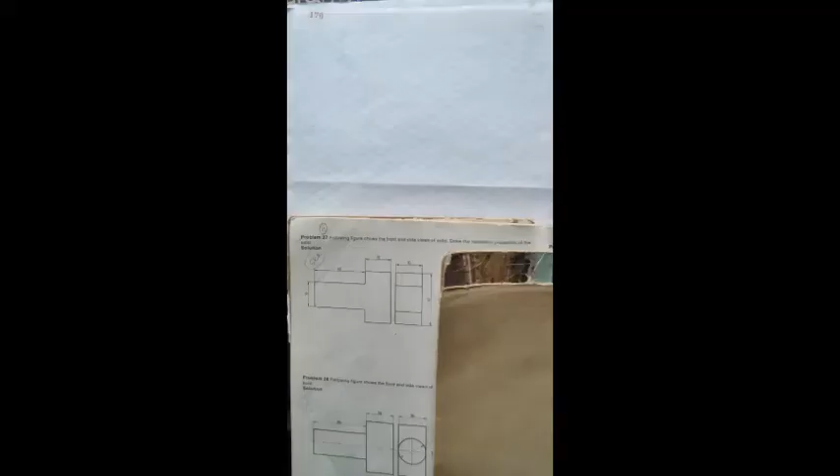Hello students, so here we go with problem number 27 from isometric projection.

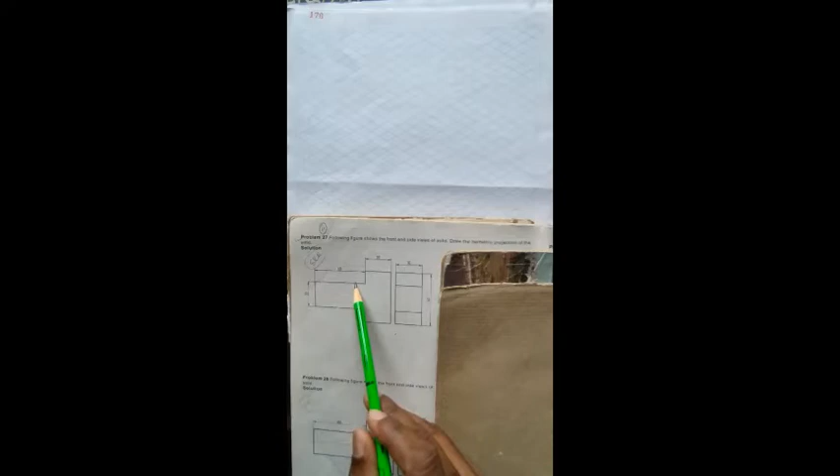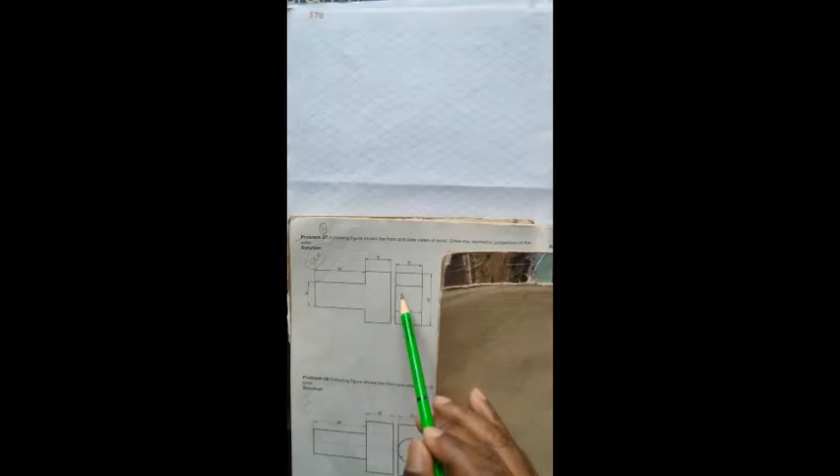Okay, so here they have given a sketch like this. We need to refer to the dimensions. For example, this is 30 mm, the length of this one is 60 mm, and the top face is 30 mm again. In the side view it is 30 mm, so this is a square, and the height of this one is 60 mm. So we have a square part here, and this is also 30 in the front and 30 in the side, so again this will be a square.

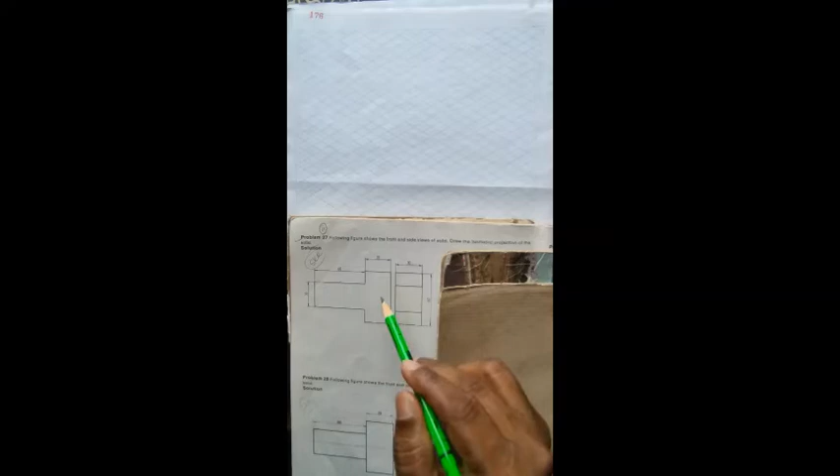So you can imagine a T joint with a square prism of 30 mm side and 60 mm length. What we can imagine here is this part coming at the front, and this going back. So to start with the problem, we'll draw one thin line.

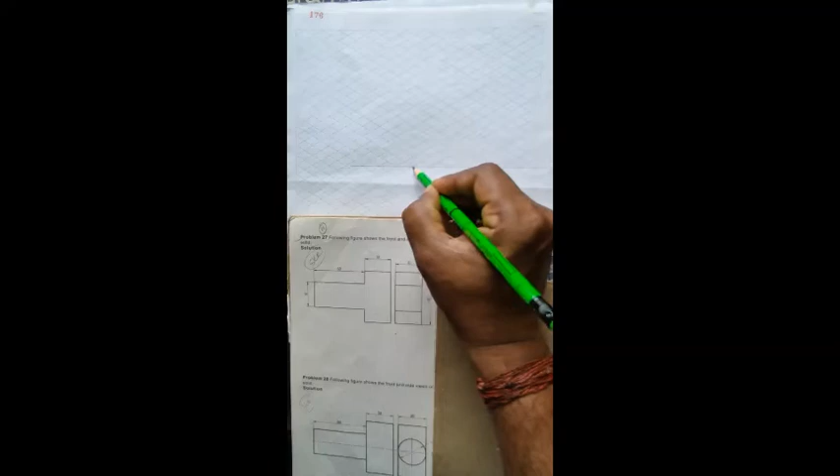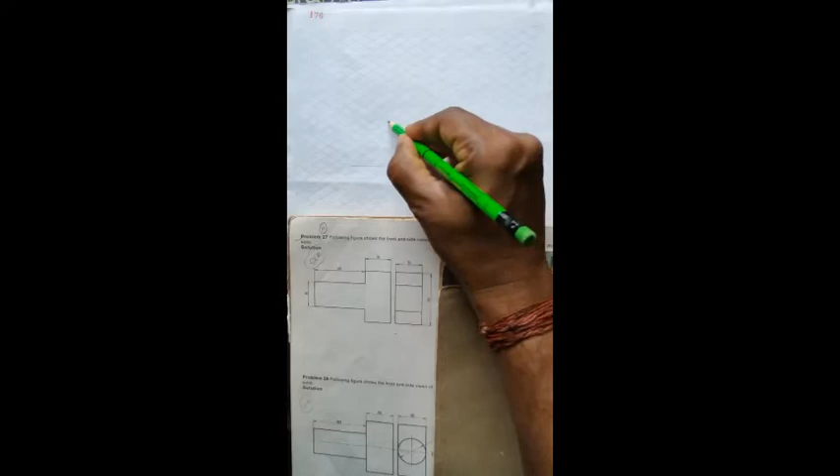If you take any one point somewhere here, the first thing is to have a 30 mm, that is the height of this one. 1 2 3, and a side again 1 2 3, again coming down 1 2 3 and again 1 2 3, so you will get a square face.

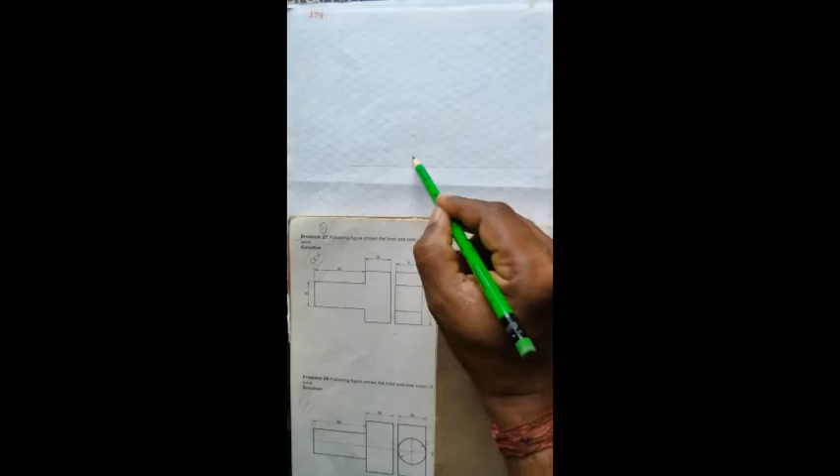This is the first face. Height 1 2 3, 1 2 3, 1 2 3, and then again 1 2 3, and the length of this one is 60 mm.

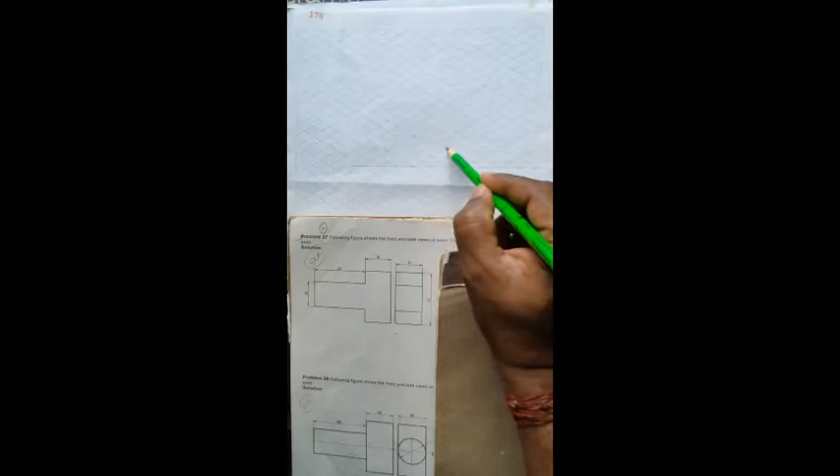So we'll take 1 2 3 4 5 6, 1 2 3 4 5 6, 1 2 3 4 5 6, again 1 2 3 4 5 6. Now again 1 2 3, 1 2 3, 1 2 3, again 1 2 3.

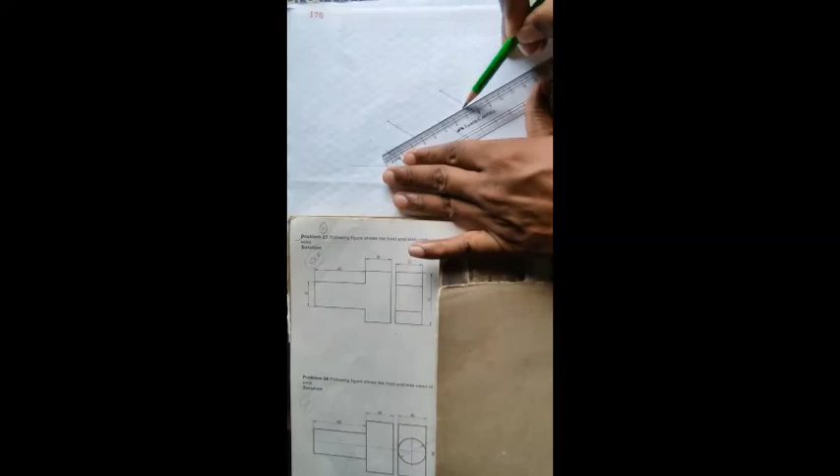So we will get two square faces which are at a distance of 60 millimeters. So what you can do here is, if you connect these, you will get... and then joining with the height, so easily you can finish your point.

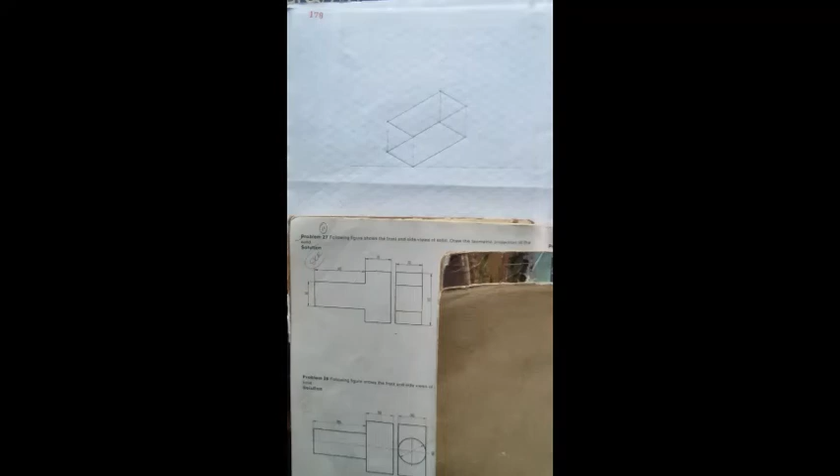So now this part is complete till here. Now we need to look into this one.

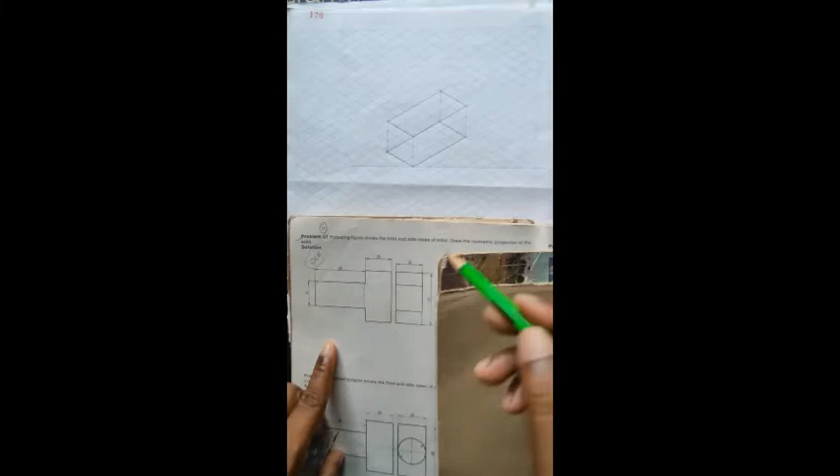Now you can see whatever the part is at exactly mid of this one. The height of this one is 60, so we need to take from the center 30 up and 30 down. So locate the midpoint here, 1 2 3, then from here 1 2 3. Then again from here, midpoint, so 1 2 3, again from here 1 2 3.

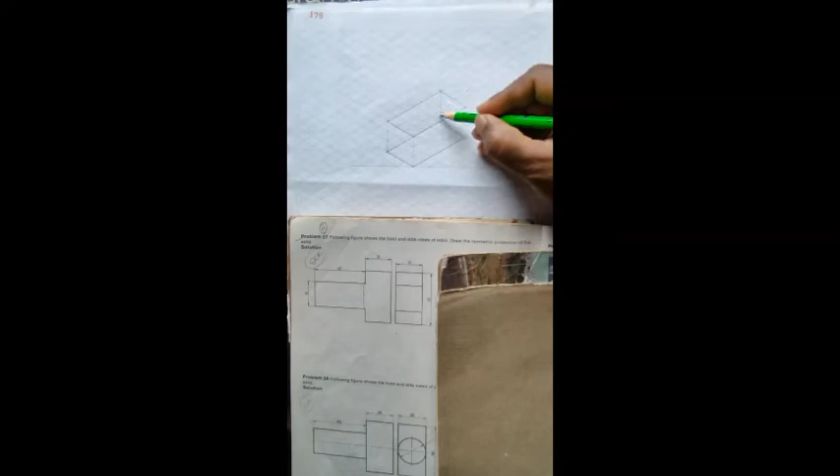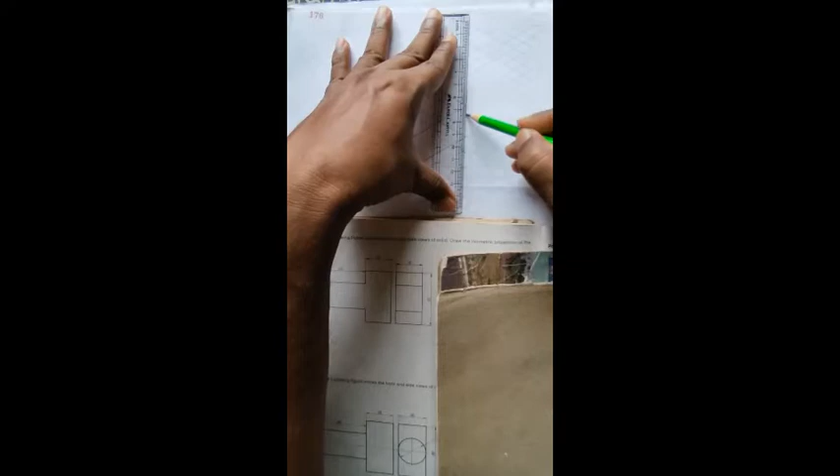Now if you see here, if you join these things, so now you can see. The length of this one will be 1 2 3, 1 2 3, 1 2 3. Now if you join here these things, you will get a square face very easily.

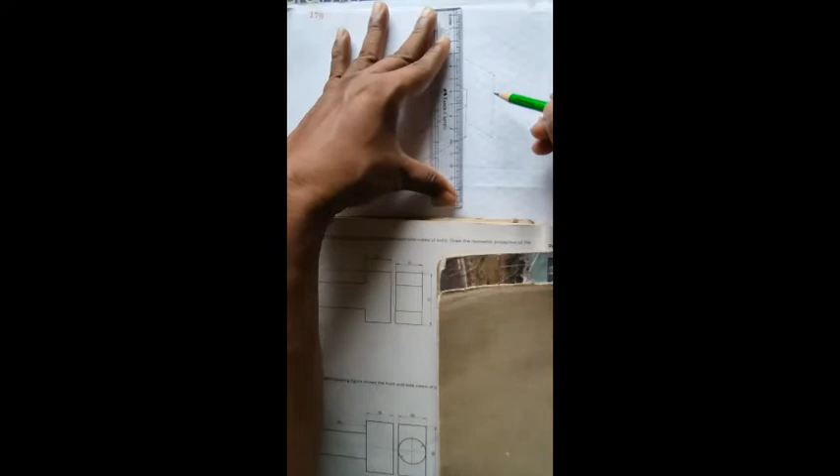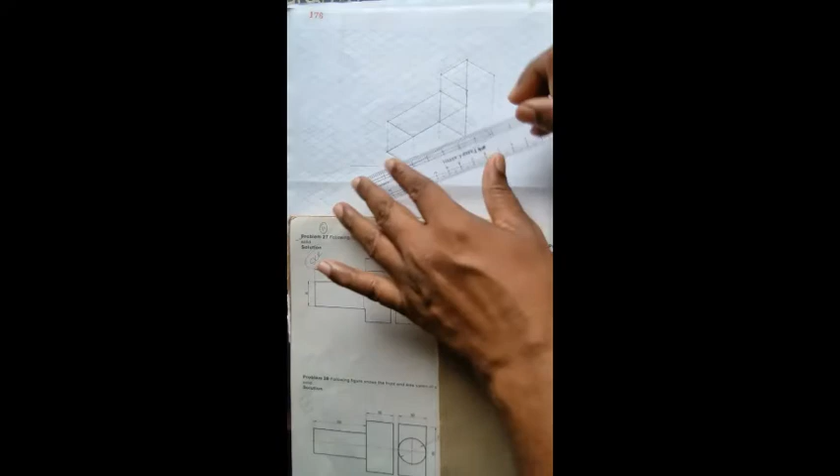So now what are the things which are visible now? This square face will be visible, and these lines will be visible, that is the top face, and these lines.

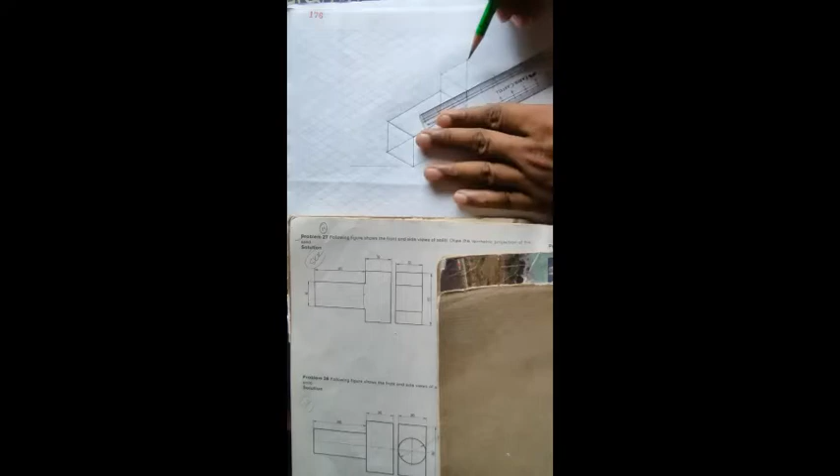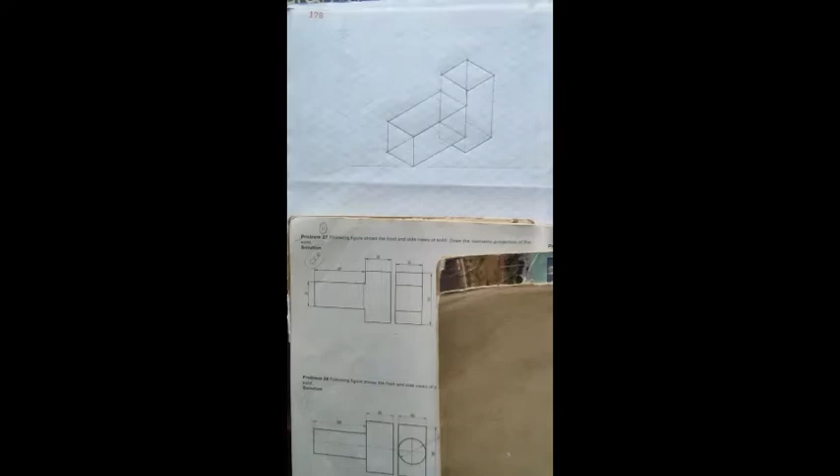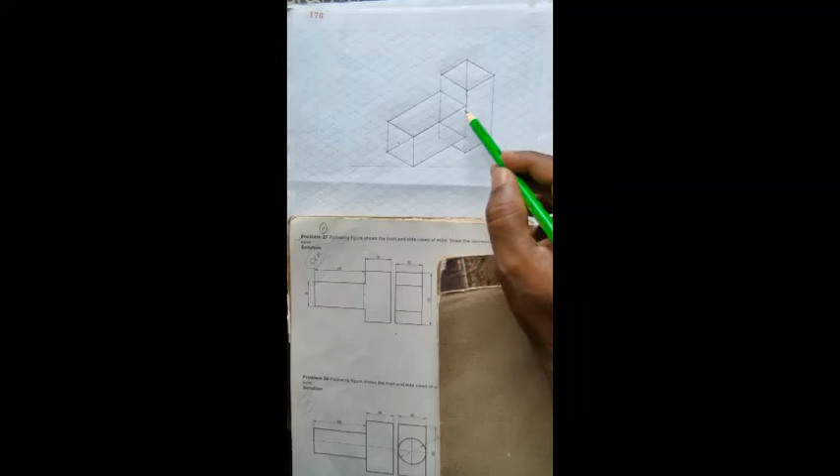Okay, this part will be visible and this line will be visible. Now the important thing is there is no connecting point here, so the line from here to here should be thin. Just erase a little bit, so this part will not be visible to us. So face 1, 2, 3, then this whole line from here to here, then this whole face, and we're left with this part. This part will be visible to us. Okay, so that's number 27.

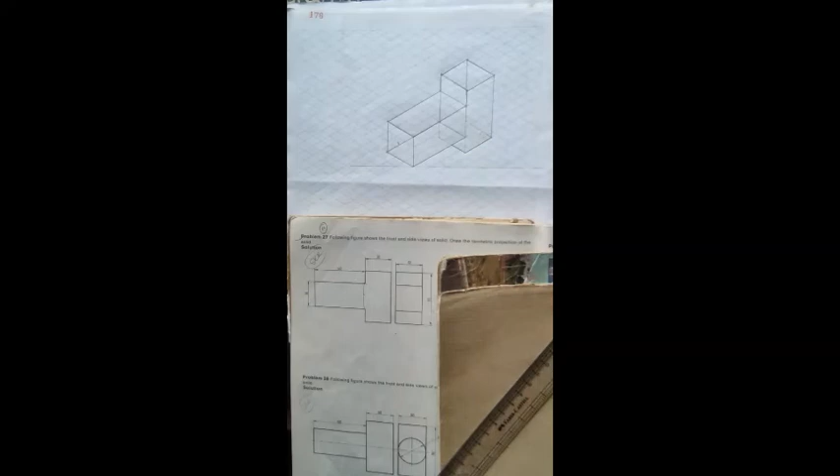So where it says, we have a square, a T joint, square prism like a T joint, which will run 90 degrees to each other. And continuing it, similarly the same.

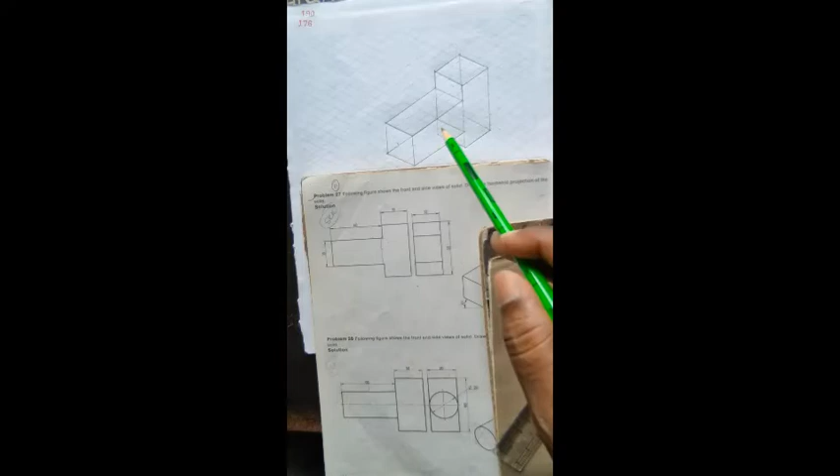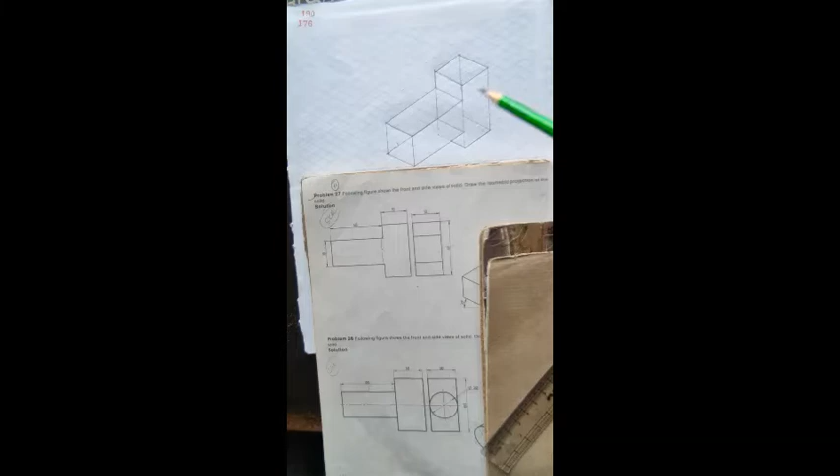If you look into problem number 28, everything will remain the same. So 60, 30, 30, 60, and the diameter is also 30. In problem 27 we constructed a square one, here we are going to have a cylinder. It is something like a base with a cylinder of 30, height 60, which is connected to a square base. You can see there is a square base. The only thing is we need to have a cylinder, that is a circular way in these things. So let's see how to go with that.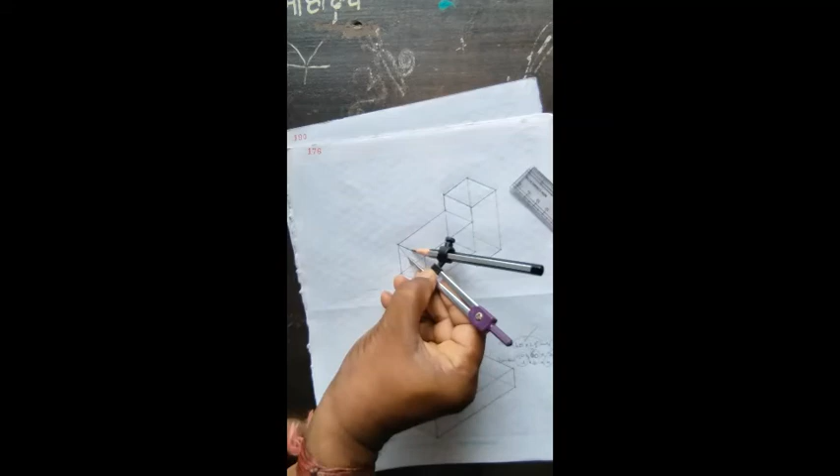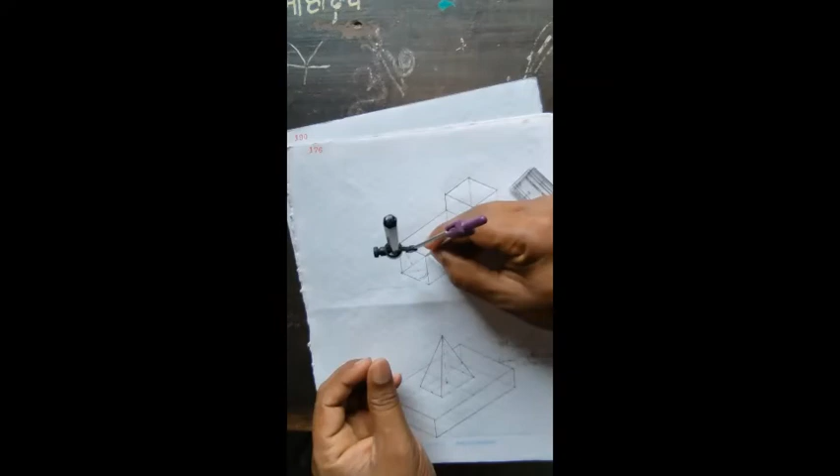So, as we already know, this is a very small one so things may not be that much clear, but we'll try. So from here we need to have arc 1. From here we need to have arc number 2. And then from here we need to have arc number 3. So from here we need to have arc number 4.

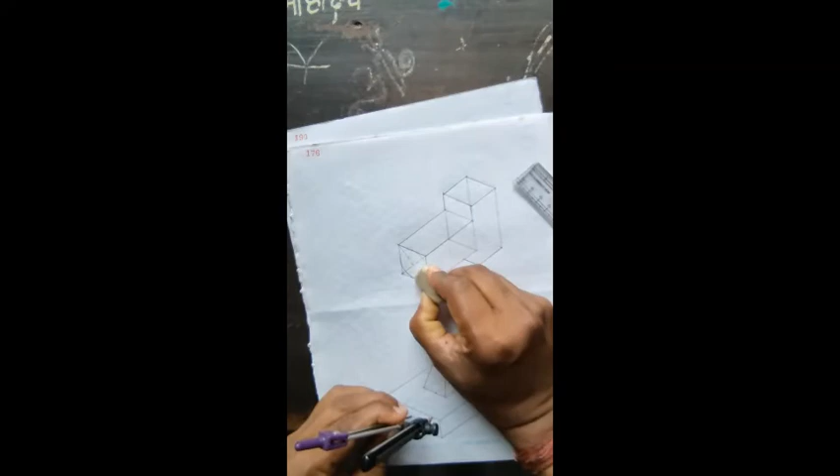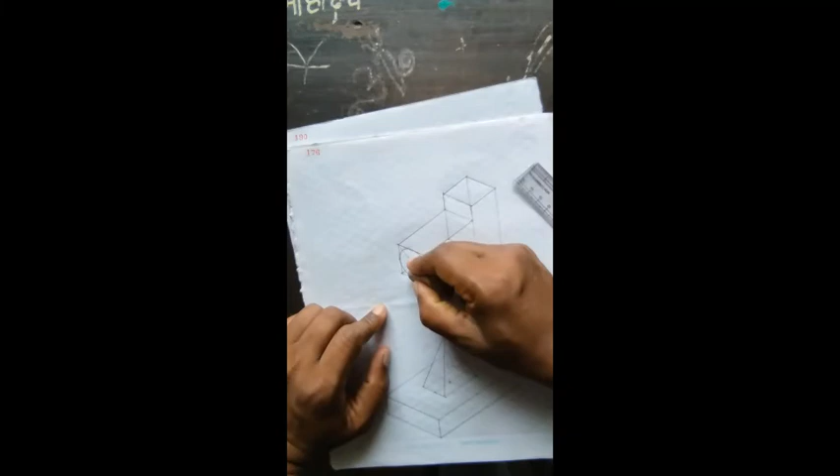So we'll get one full arc from here to here. Don't draw with the free hand, it's not visible with the things, so we'll get this one. So at this time, for number 28, these lines will be thin, because our point is for a circle, so the circle will be dark and these lines will be thin.

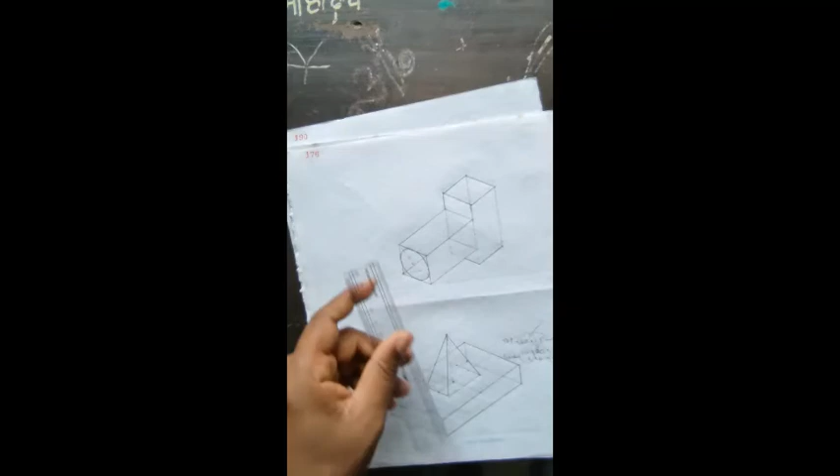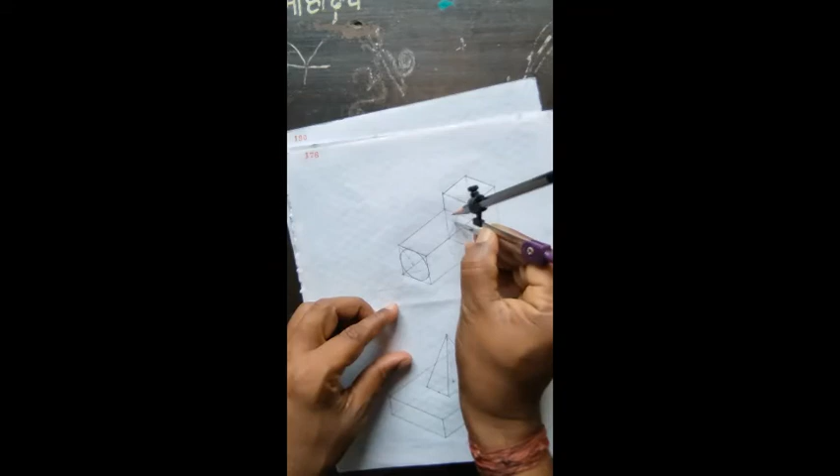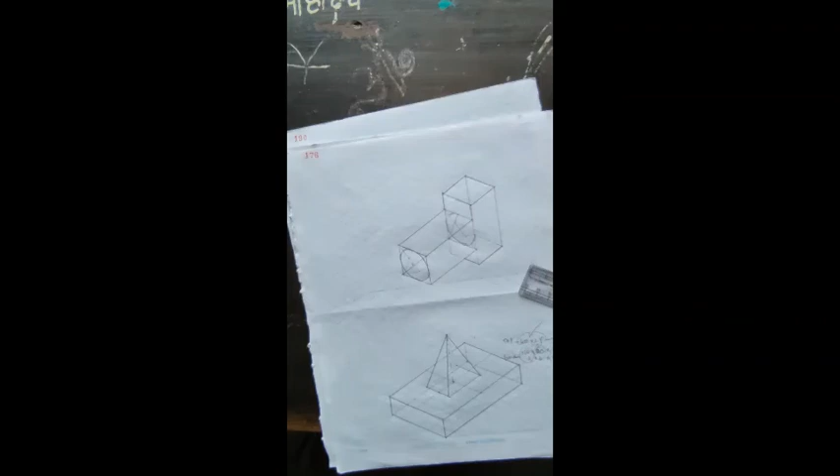Similarly, we have a square of 30 here, so we need to have a diagonal, then midpoints 1, 2, 3 and 4. Then let's have 2 lines, 1 and 2. Then the first one, here to here, the second one will be from here to here, the third one from here to here, and the fourth one will be from here to here.

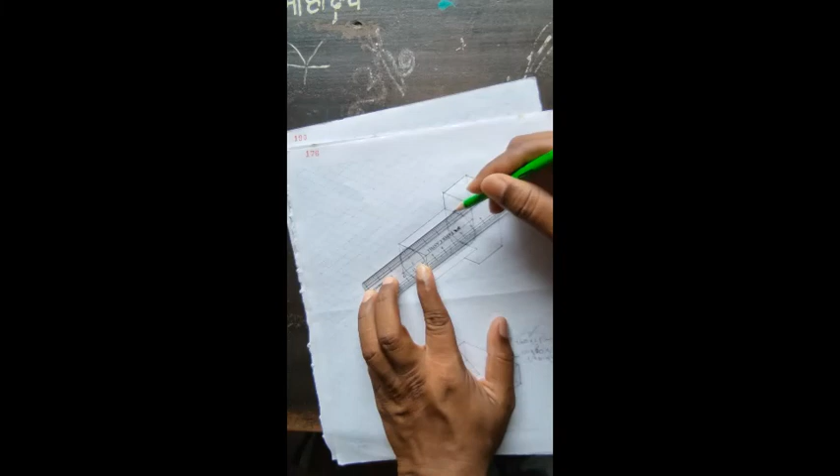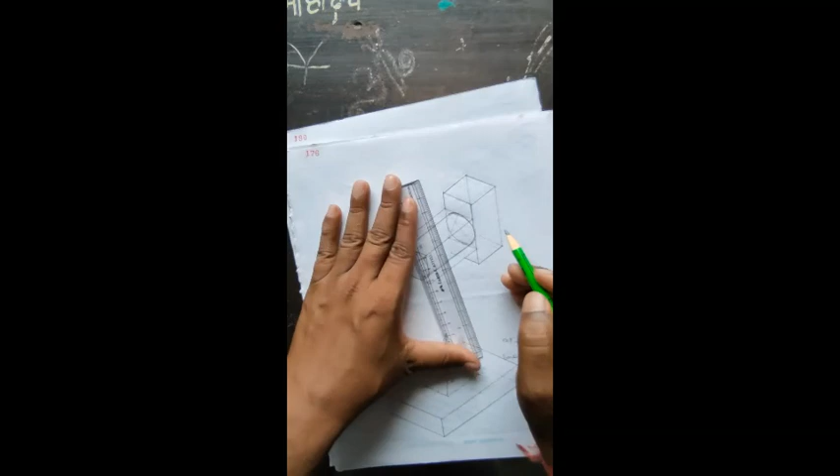So now you need to keep a scale here like a tangent, and then join, then at the top tangent, then join. So now from here only this part of the curve will be visible, with this line visible, and this whole curve and this line with this much of the curve. So remaining here this line will be visible. Remaining all the lines, this line will be visible till here, and one more, this line will be visible till here.